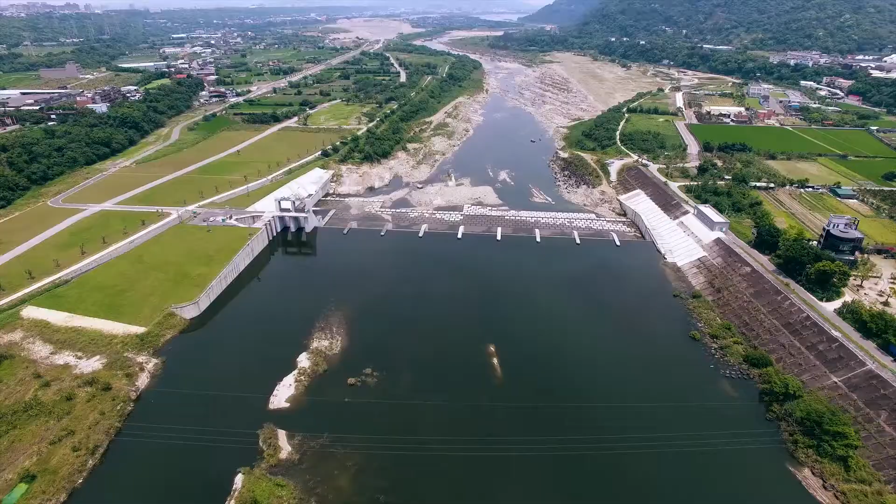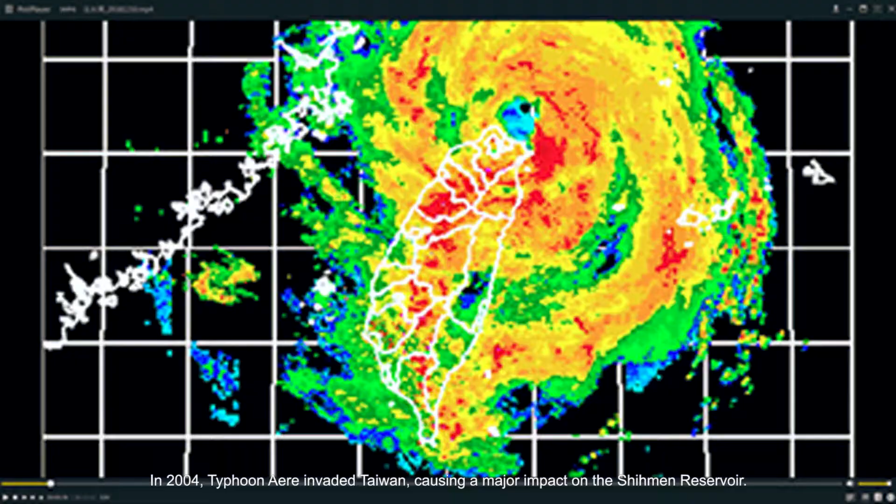In 2004, Typhoon Aere invaded Taiwan, causing a major impact on the Shihmen Reservoir. The flood brought a large amount of driftwood and mud to block and damage the intake facilities. The high concentration of muddy water caused an unprecedented 18-day water stoppage in Taoyuan. The scenery of people lining up to carry water was everywhere, affecting the residents' daily life severely.

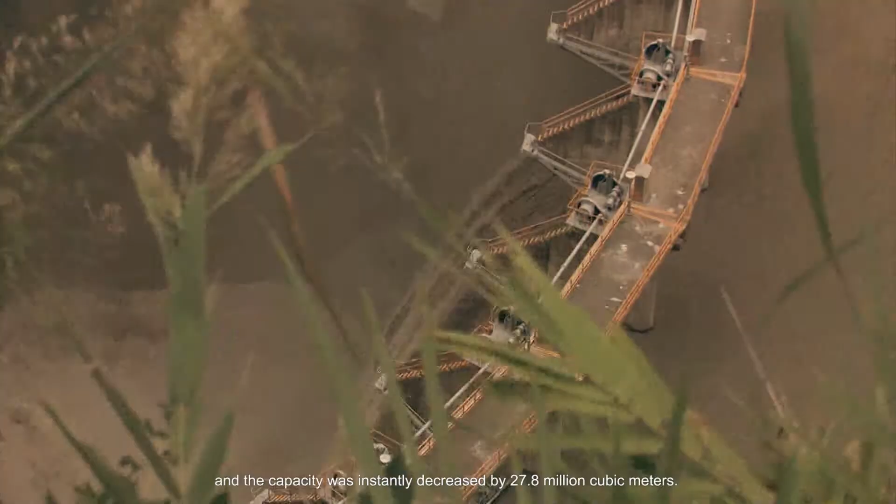The disaster caused by Aere was the biggest one in the Shihmen Reservoir history since its completion in 1964. A large amount of mud and sand accumulated, and the capacity was instantly decreased by 27.8 million cubic meters. The reservoir siltation rate increased from 18% to 27%, and the water supply capability was greatly affected.

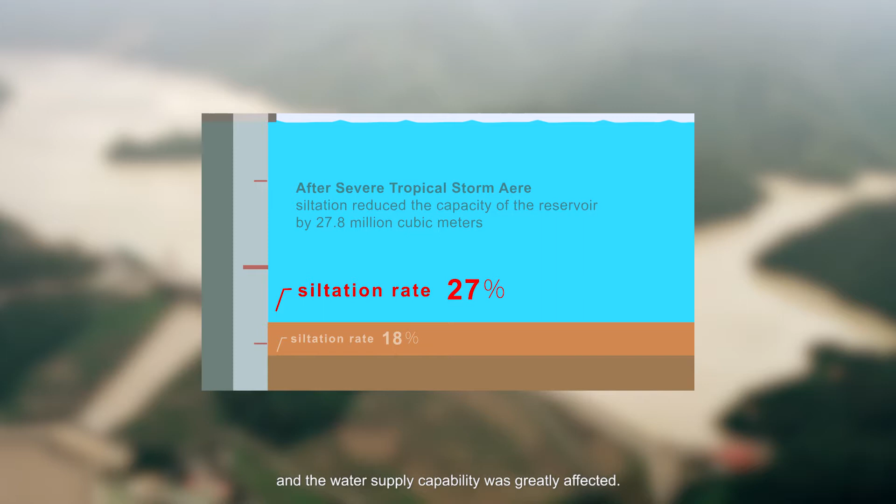The high turbidity of raw water during typhoon directly affects the downstream Yuanshan Weir to supply tap water. The role of the Shihmen Reservoir in water supply has been greatly impacted both in terms of quantity and quality. In order to save Shihmen Reservoir, the Legislative Yuan passed the Special Act governing the management of Shihmen Reservoir and its catchment area in 2006. The Zhongzhuang Auxiliary Lake project is part of the Special Act and is a significant backup facility for tap water supply when high turbidity happens.

The Zhongzhuang Auxiliary Lake was built to stabilize the water supply of Shihmen Reservoir. To understand the role of the lake, you should know the Shihmen Reservoir beforehand. Shihmen Reservoir is the earliest multi-purpose reservoir in Taiwan. Its objectives include irrigation, public water supply, power generation, flood control, and sightseeing.

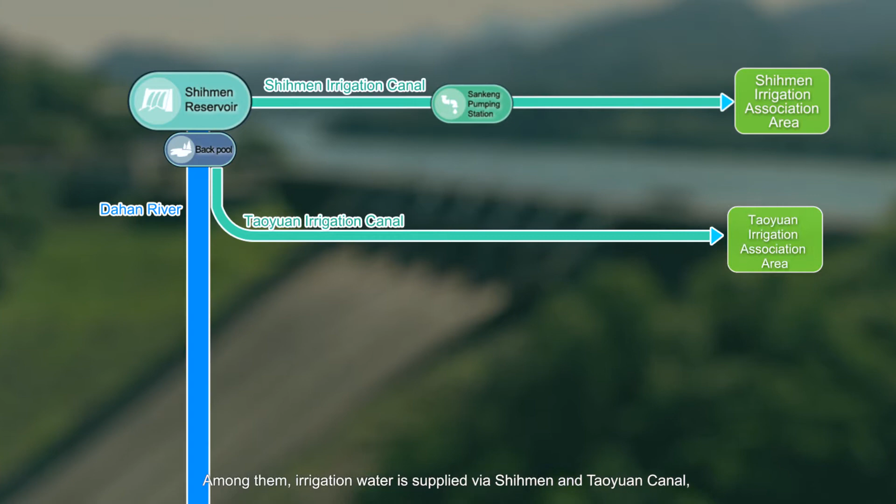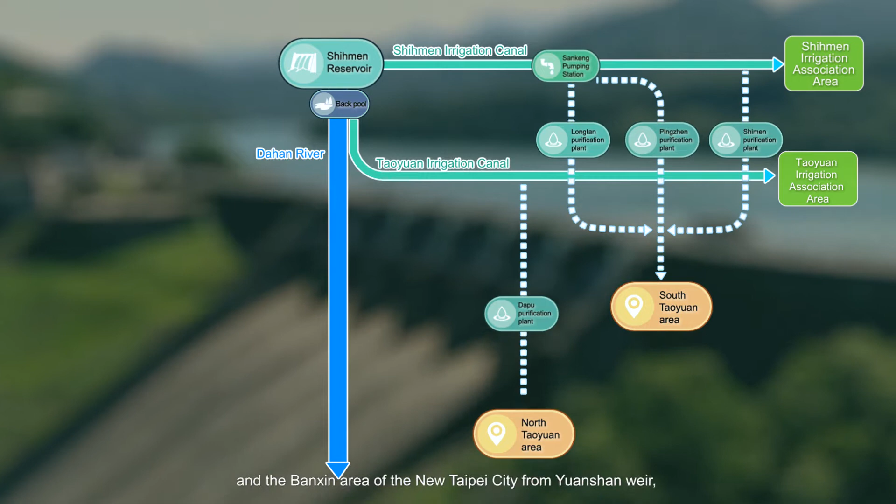Among them, irrigation water is supplied via Shihmen and Taoyuan Canal, while the public water is supplied in three ways: South Taoyuan area through Shihmen Canal, North Taoyuan area through Taoyuan Canal, and the Banxin area of New Taipei City from Yuanshan Weir, which is downstream from Shihmen Reservoir and Dahan River.

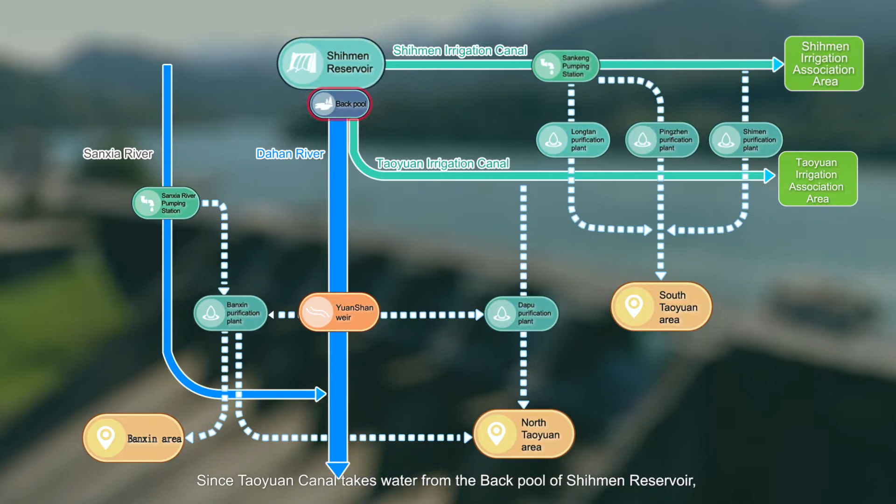Since Taoyuan Canal takes water from the Back pool of Shihmen Reservoir, when the reservoir sluices sand, the water turbidity in the Back pool and Yuanshan Weir will soar, endangering the supply of tap water in the North Taoyuan and Banxin areas. The Zhongzhuang Auxiliary Lake is made to solve this problem.

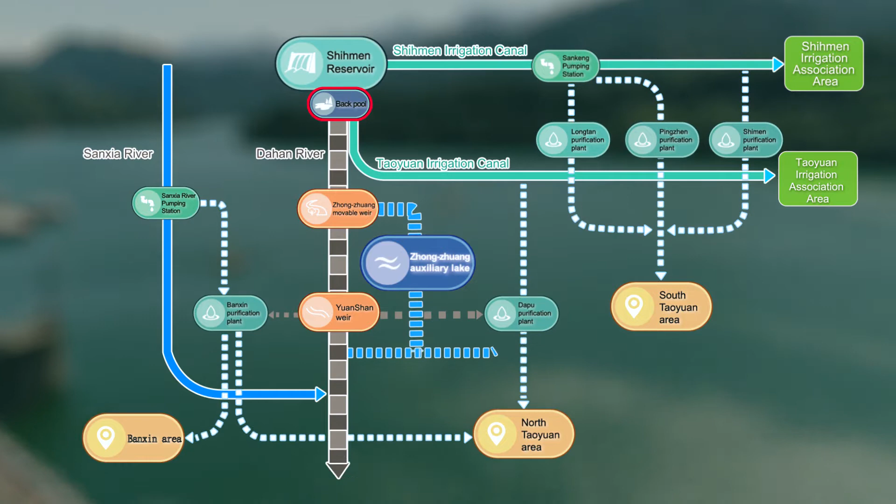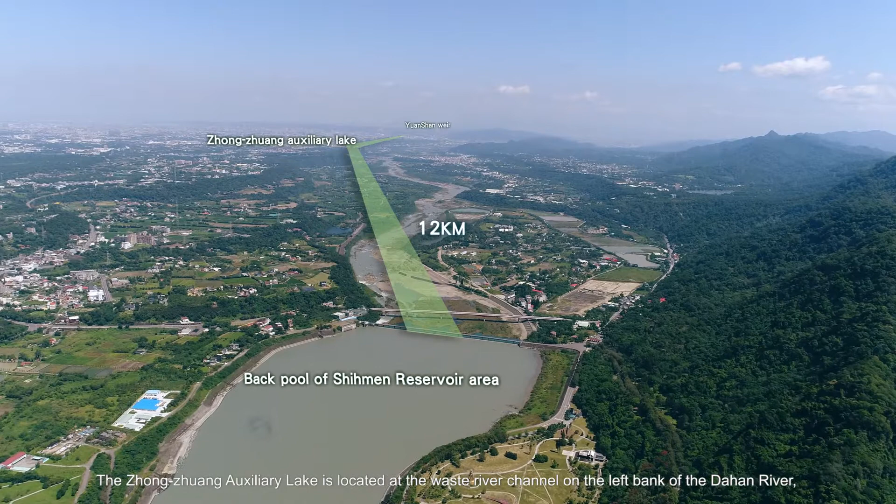The Auxiliary Lake is located at the waste river channel on the left bank of the Dahan River, about 12 kilometers downstream from the Back pool of Shihmen Reservoir and less than 5 kilometers from the downstream Yuanshan Weir. The pool area is 41 hectares and the length of the road around the pool is 3.6 kilometers.

On fine days, the landscape of the river and valley on both sides of the Dahan River is clearly visible. To the upstream, you can see the spillway of the Shihmen Reservoir. Meanwhile, to the downstream, you can vaguely see Taipei 101. If you look down from the sky, the auxiliary lake is like a big cello quietly lying on the side of stream and green fields, calm and content. The nearby residents often walk here in the morning or evening, enjoying the tranquility far away from the noisy city.

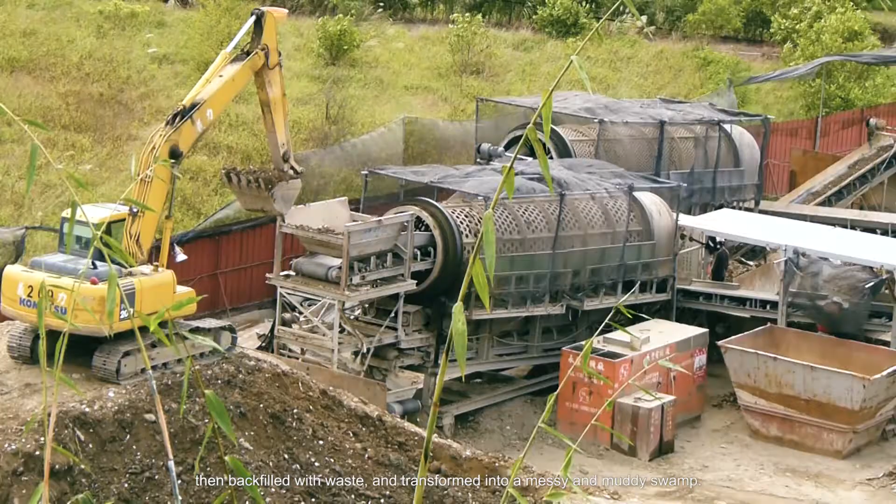The beauty of Zhongzhuang Auxiliary Lake has not come easily. It used to be a waste river channel, deserted and infested with weeds. Many years ago, unscrupulous businessmen took valuable sand and stones, then backfilled with waste, transforming it into a messy and muddy swamp. Now, in order to meet the need of the reservoir's backup water supply, the waste and mud were excavated and removed. The lake is built surrounded with banks in the form of curved lines, thereby creating beautiful and pleasant waters. This scenery can be said to be an incredible miracle. It is really amazing.

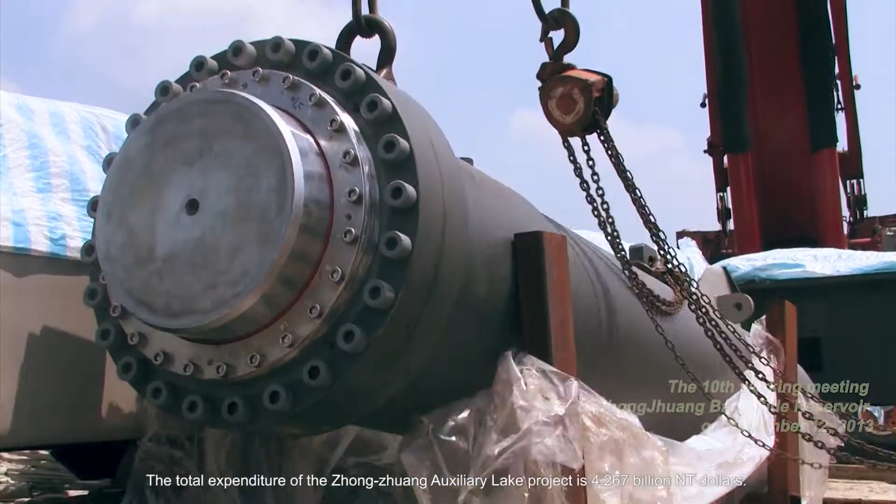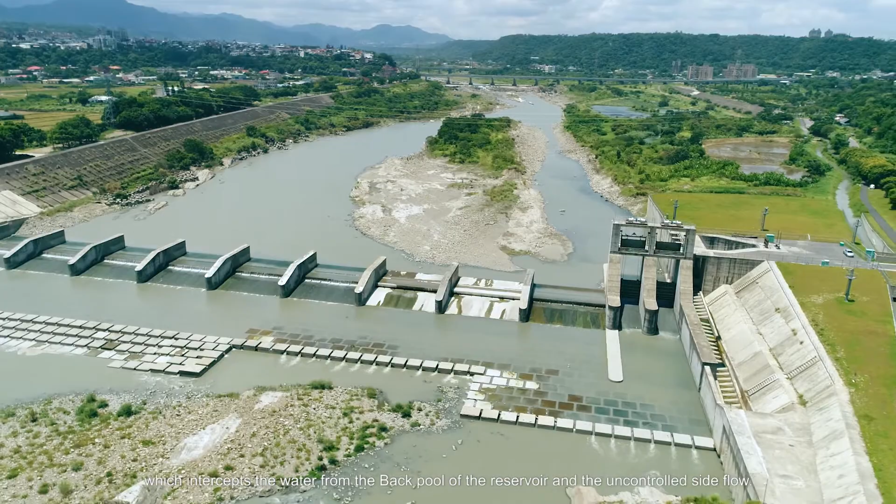The total expenditure of the Zhongzhuang Auxiliary Lake project is 4.267 billion NT dollars. The main works are the weir and the lake engineering. Zhongzhuang Movable Weir is located in the main channel of Dahan River, which intercepts the water from the afterbay of the reservoir and the uncontrolled side flow. It is the intake facility of the lake, transporting water through a 1.6-kilometer box culvert to the lake.

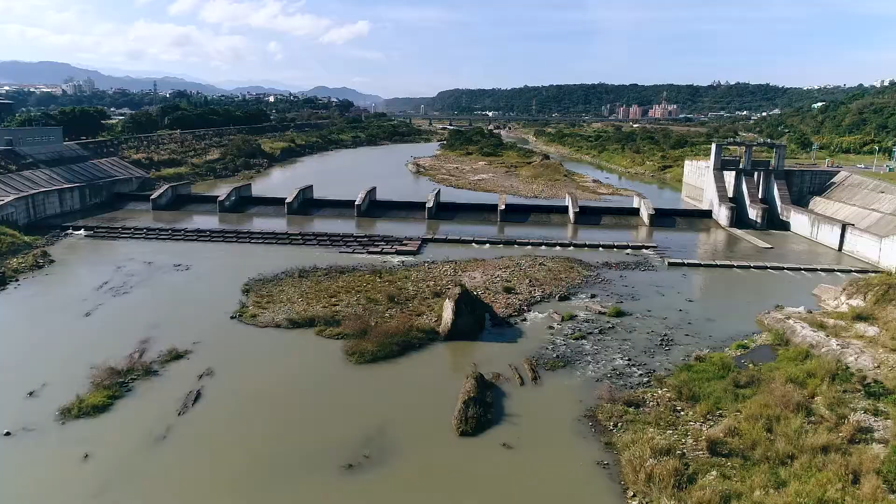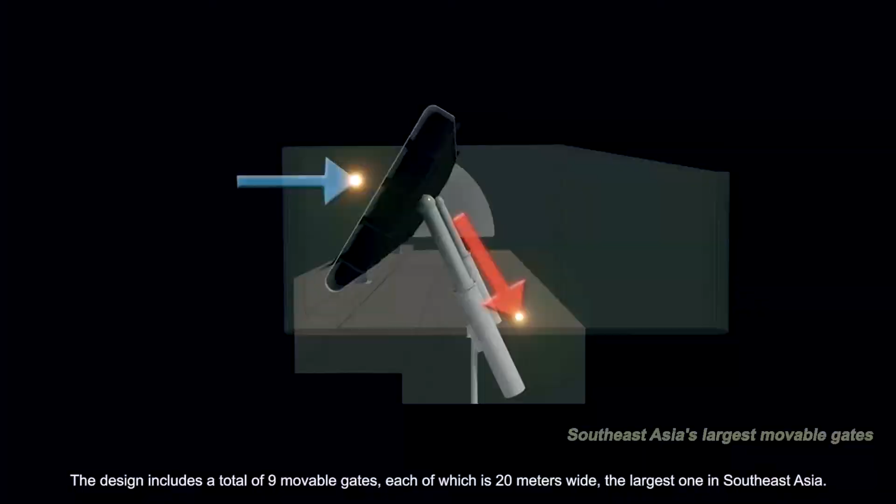Zhongzhuang Weir is equipped with movable gates, different from the fixed concrete weir commonly used in Taiwan. The design includes a total of 9 movable gates, each of which is 20 meters wide, the largest one in Southeast Asia. In normal time, the gates are laid down, allowing the stream to pass through without hindrance. As diverting water, the gates are fully raised up.

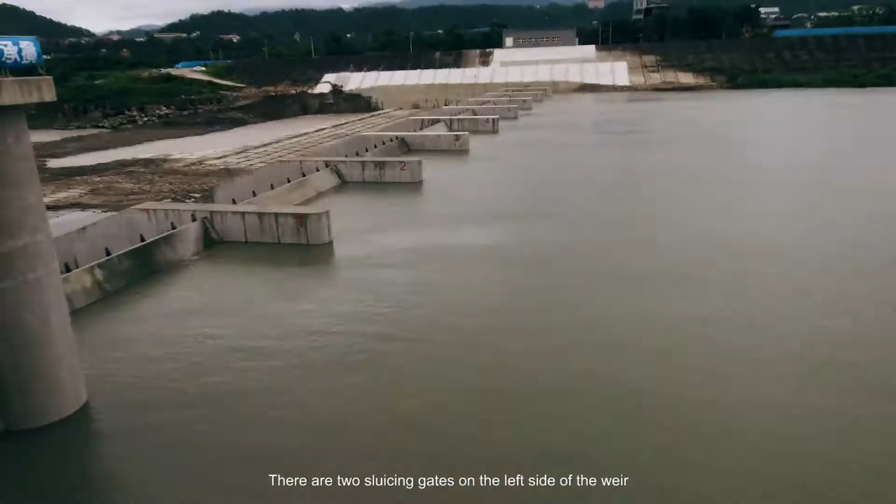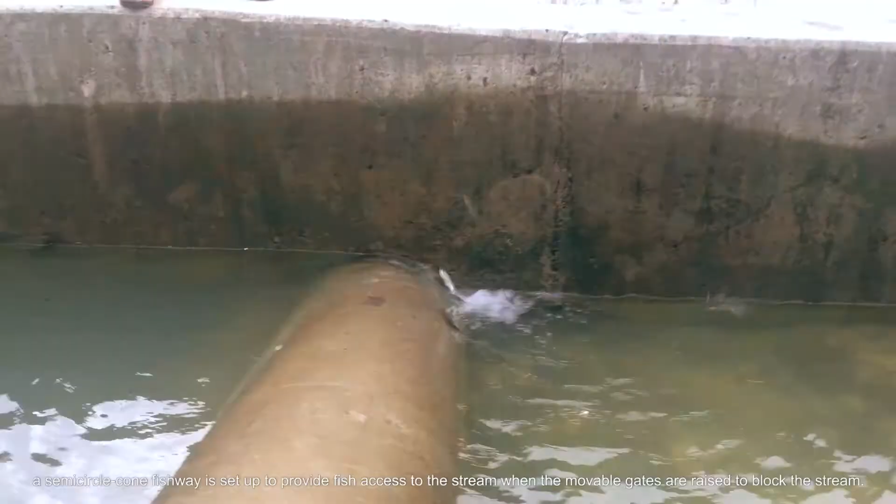There are 2 sluicing gates on the left side of the weir to ensure that the function of the intake on the left bank is not affected by the sediment. On the left bank, a semicircle cone fishway is set up to provide fish access to the stream when the movable gates are raised to block the stream. The engineering won the 15th Public Project Gold Excellence Award in 2015.

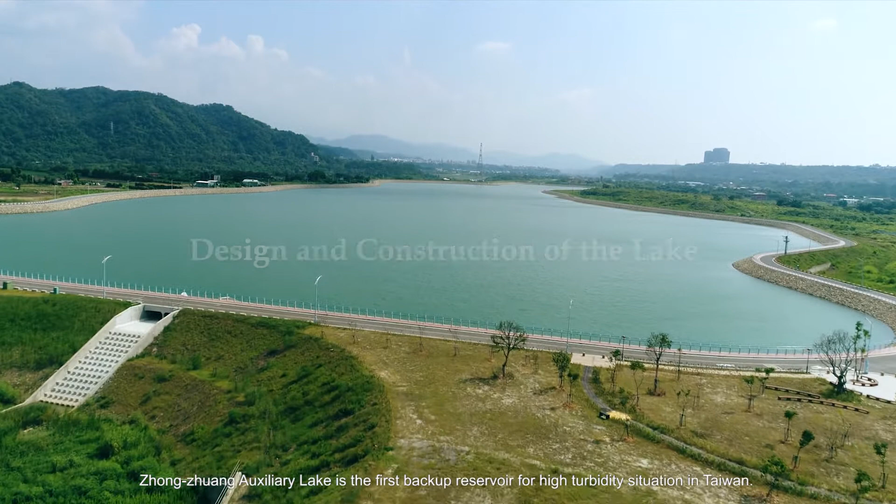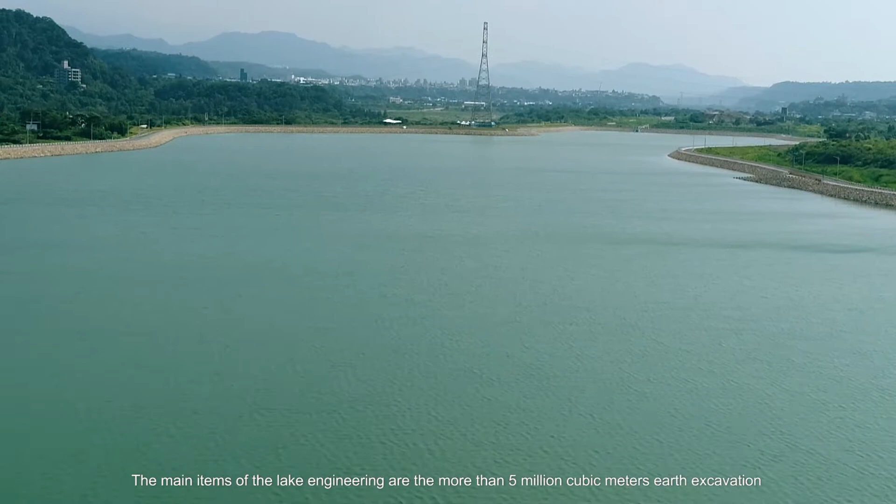Zhongzhuang Auxiliary Lake is the first backup reservoir for a high turbidity situation in Taiwan. The full depth of the lake is 15 meters and the effective capacity is 5.05 million cubic meters. The main items of the lake engineering are more than 5 million cubic meters earth excavation and 3.6-kilometer banks construction. As originally being a swamp wetland, the base of the lake had high groundwater level and weak geological condition.

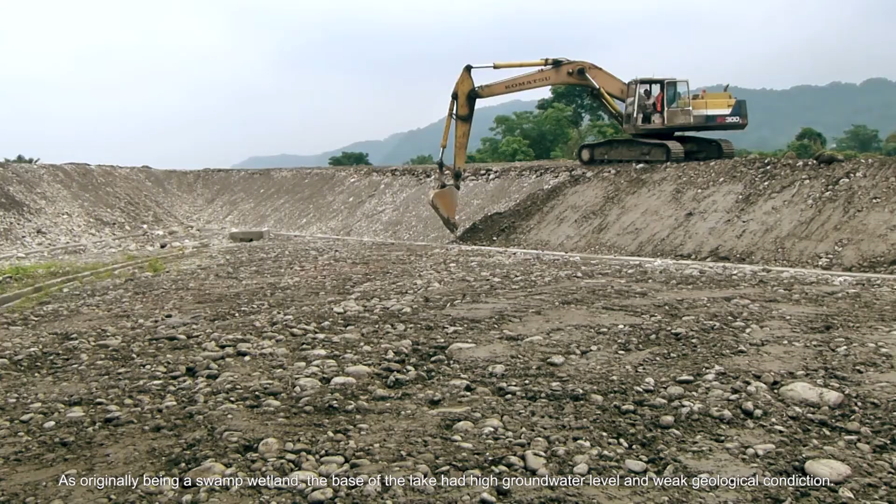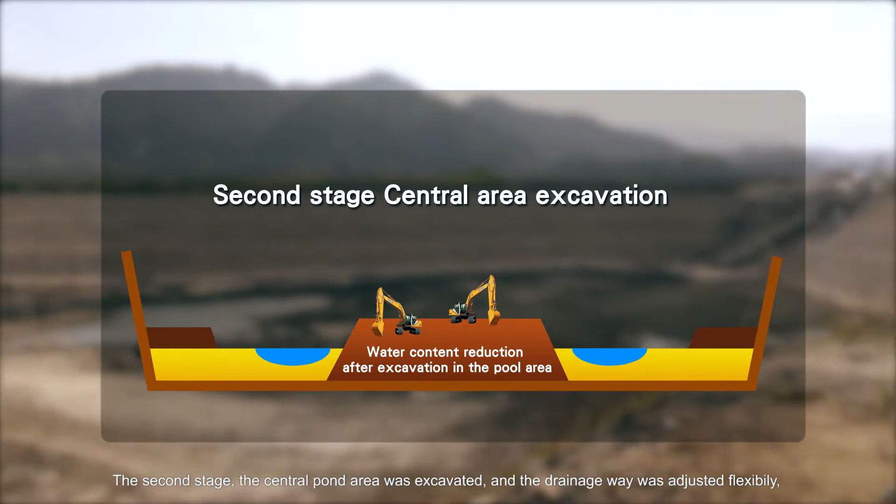In order to overcome the problem of excessive soil water content, the excavation was carried out in 2 stages. The first stage was based on a ring-shape excavation. By using the head difference gravity, make the water drop to the guide groove, pumping the water in the guide groove out to the pond on the central area with high water content soil. The second stage, the central pond area was excavated, and the drainage way was adjusted flexibly. Also, the water was discharged into the guide groove and then discharged to the downstream of the lake.

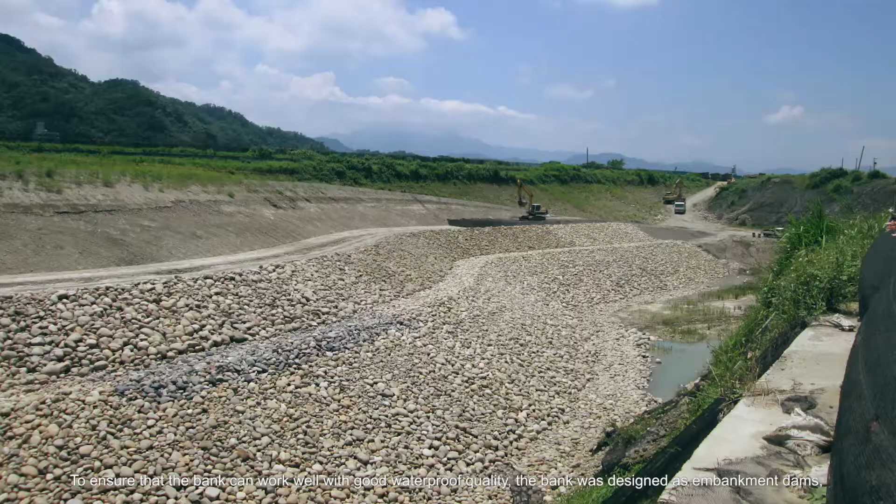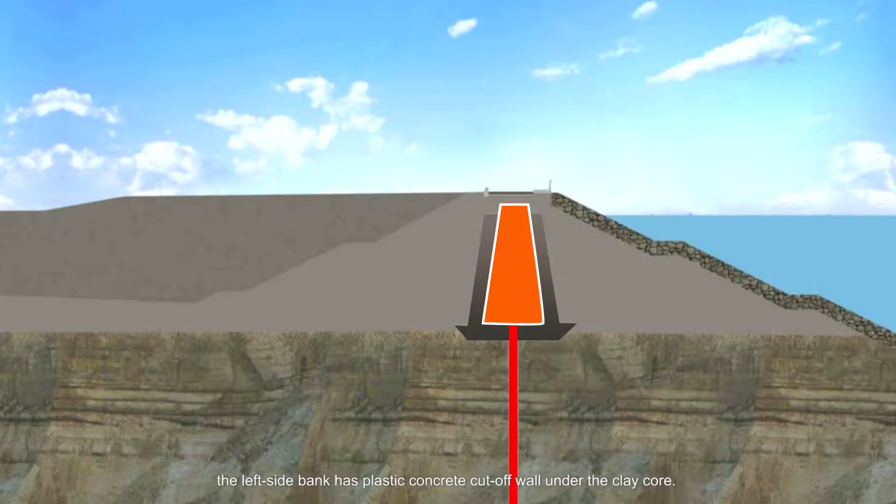The bank was constructed almost the same time as the second stage of excavation. To ensure that the bank can work well with good waterproof quality, the bank was designed as embankment dams and different cross-sections according to the geological environment conditions. In order to avoid groundwater with doubtful quality, the left side bank has plastic concrete cutoff wall under the clay core. This type of bank is 2,070 meters long and accounts for 57% of the total length of the bank.

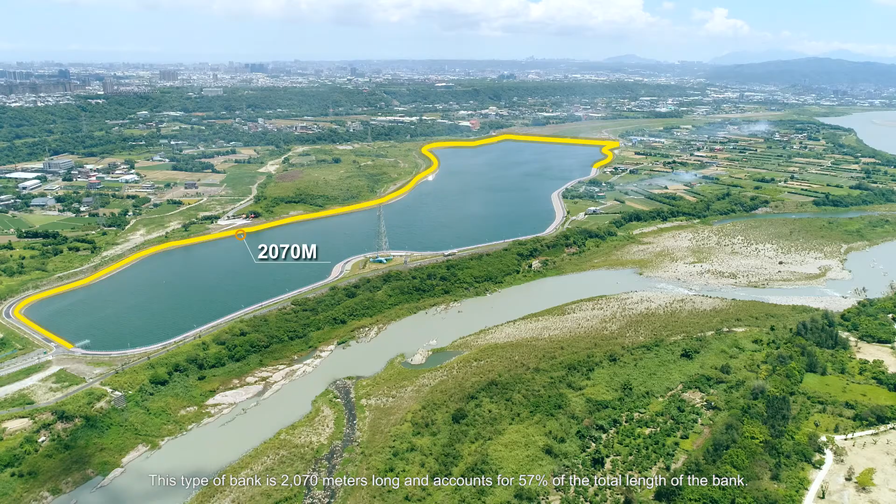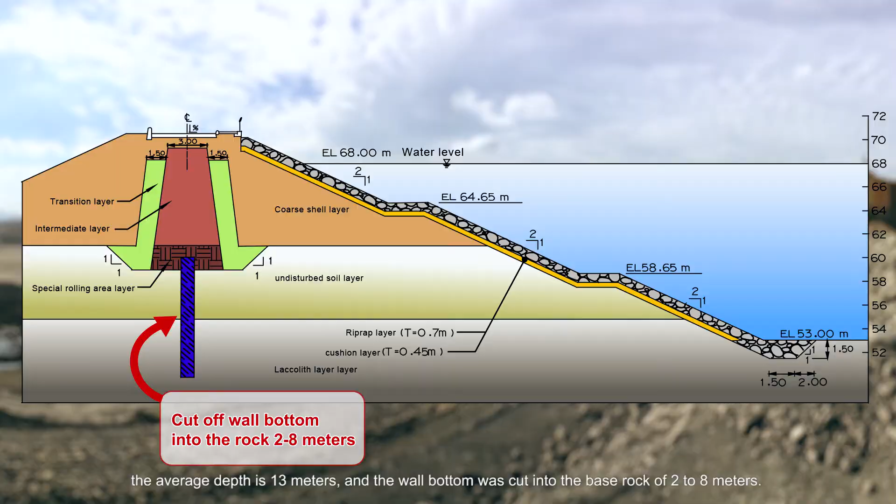The thickness of the plastic concrete cutoff wall is 1 meter. The average depth is 13 meters, and the wall bottom has cut into the base rock of 2 to 8 meters. The wall was constructed with jumping islands method to ensure the seal between the wall units. Since the construction can be carried out in dry condition in the pool area at the end of the second stage excavation, it can be inferred that the waterproof quality of the cutoff wall is excellent. The construction quality of this engineering is excellent. In 2017, it won the 17th Public Project Gold Distinguished Honor Award.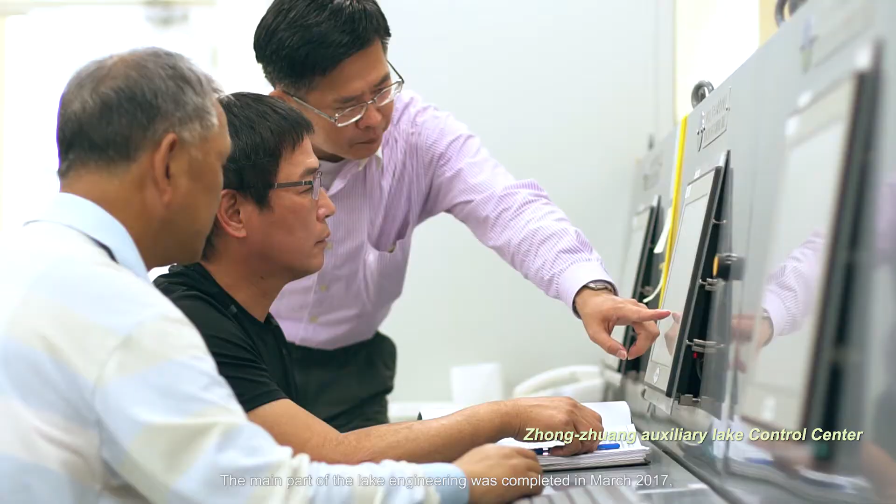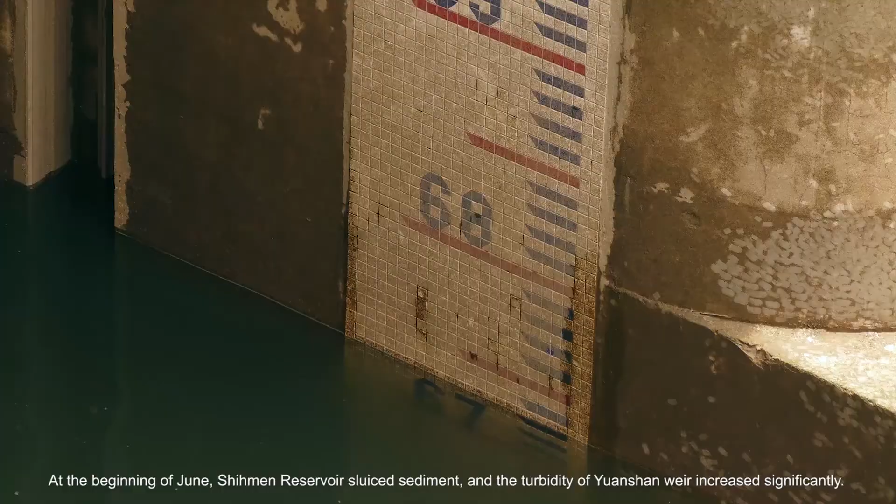The main part of the lake engineering was completed in March 2017, and on May 10th, the weir started to divert water to the lake. Then on May 21st, the water level reached elevation 62.5 meters. It was filled full to elevation 68 meters on June 18th. At the beginning of June, Shihmen Reservoir sluiced sediment and the turbidity of the Yuanshan Weir increased significantly. The lake successfully enabled to back up water supply. The first shot was quite smooth.

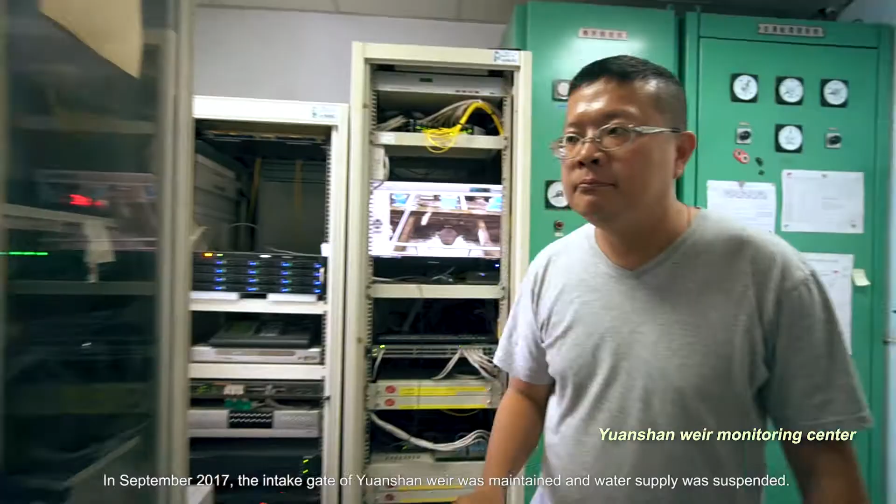In September 2017, the intake gate of Yuanshan Weir was maintained and water supply was suspended. The lake was once again equipped to back up. The total amount of backup water reached 10 million tons, indicating that the lake can be used as maintenance support of Yuanshan Weir.

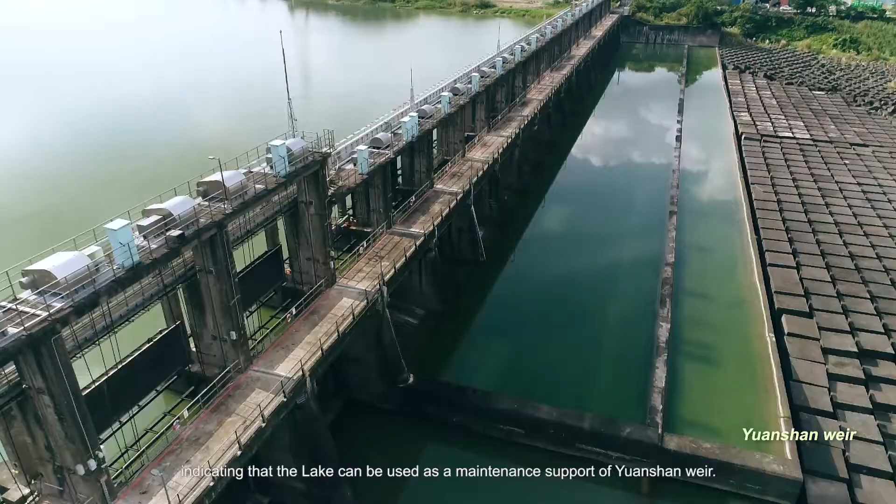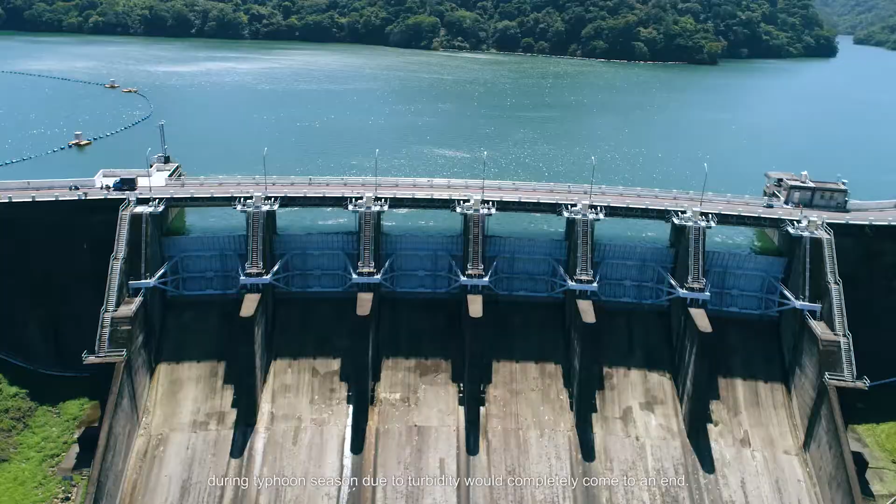On December 17, 2017, President Tsai presided over the completion ceremony of the lake engineering. Thus, it formally announced the nightmare of water stoppage of Shihmen Reservoir during typhoon season due to turbidity would completely come to an end. The completion of the Zhongzhuang Auxiliary Lake marked the final step of the 13-year Shihmen Reservoir renovation project. This also showed that the Shihmen Reservoir, having been in operation for more than 50 years, was still strong enough and initiated a brand new era. Let us hope and wish that the Shihmen Reservoir has another rich 50 years.